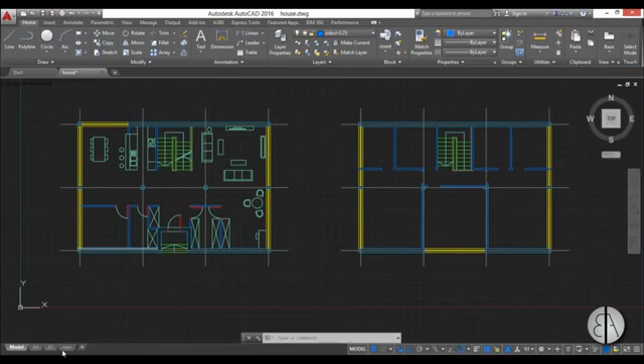First thing you need to do is create a new layout. Now we're in the model, and here we have layouts, we have model, and we have two layouts. We're just going to create a new one by clicking this new layout button. You can rename it by right-clicking on it and finding rename, and call it new. I'm going to click on it, and here we have our layout.

Now we don't really know which size of sheet this is, and here we have a window inside of our drawing which we don't really need at this point, so I'm just going to select it and delete it. Now we're going to set up the size of this sheet.

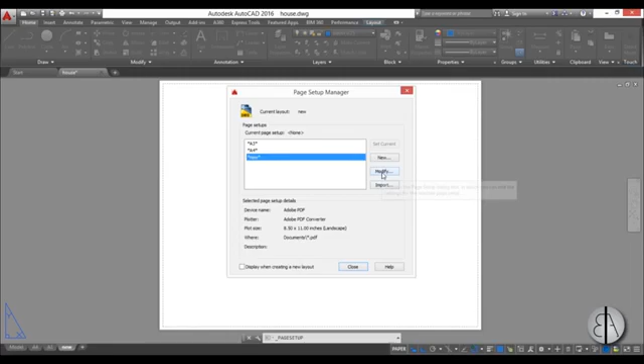I'm going to go up in this Start menu, find Print, Page Setup, and here we have our Page Setup Manager, and here we have our new layout. So I'm just going to go to Modify, and first under Name, here we have to just set it up as DWG to PDF. This is best if you want to export it as PDF later.

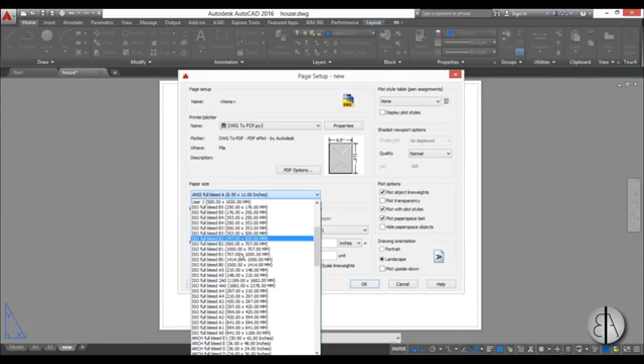Now as paper size, I'm going to use an A3 and portrait, because I want these two floor plans to be one on top of each other. So I'm just going to find ISO full bleed A3, which is over here, and if you select the first one it will be landscape, and if you select the second one it will be portrait. You can manage that later over here, but I prefer to do it this way. And of course check here portrait as well.

Now we have to customize the scale. Here we have some fraction that we don't really need. For now I'm just going to write it as 1 millimeter equals 1 unit, and that is wrong at the moment. This drawing is in centimeters, and 1 millimeter is 0.1 centimeters, or 10 millimeters is 1 unit or 1 centimeter. So just make sure that your units match. If it was in meters, then I would have to write 1000 millimeters.

Okay, now we've done the scale part. Now we need to set up the plot style. You need to open up this menu. If you choose none, all the colors will be preserved, and you will have basically a colored drawing. But if you find grayscale, that will make sure that everything that's a darker color will be a darker gray, and everything that's lighter, like yellow for example, will be lighter gray. I prefer monochrome, which basically means that everything is black.

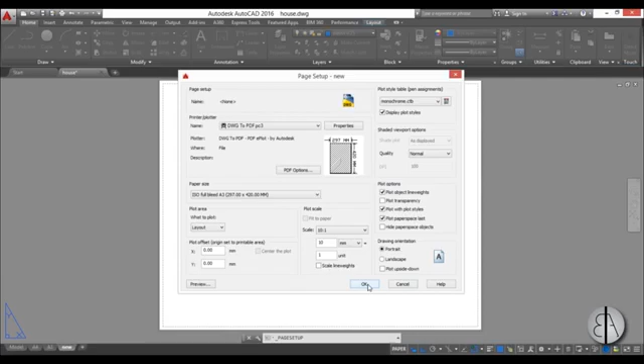Just check here display plot style so you can see in this layout view your correct plot style. For quality I'm going to leave it at normal, I found that this works best, you don't need to make it better. And here we have some options - if you have any transparencies, for example some hatch that's transparent, you would want to check this, but I don't, so I'm leaving it unchecked. That's everything, so I'm just going to click OK and close this up.

So here we have a portrait A3. Now we need to create a window inside of our model for both floor plans. So I'm just going to go to VPORTS, which is the command for viewports, and because we're doing 2D drawings I'm just going to leave it here at 2D.

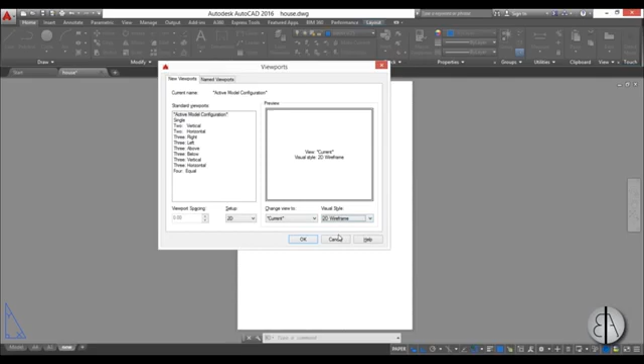If you did 3D you need to check 3D, and for visual styles I leave it at wireframe. It doesn't really matter when you're in 2D. So I'm just going to go OK, and now we can create a window, one window on the upper half of this A3.

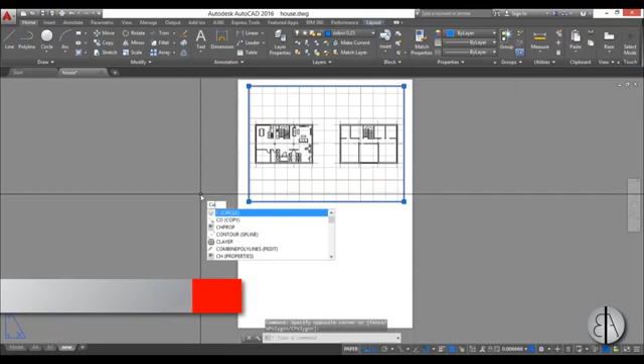Now we have our two floor plans, but we have a problem. We want this floor plan to be above and the other one below. So what do we do? We're just going to select this one, copy it, and place it underneath.

Now that we have our two viewports on top of each other, we need to set up the scale. First we'll double click inside of this. You see now we're in paper, but if we double click inside we'll be in model space, so we can move around or zoom in or zoom out.

If we zoom, it won't really be a correct precise scale, so to set that up correctly you need to go to this drop menu, open it up, and find your scale. I'm just going to use 1 to 100, and now this is in perfect scale.

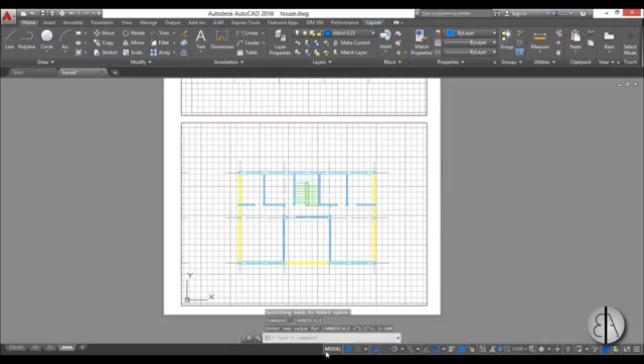I like the position of this on paper, so I'm just going to lock it in place here, and do the same thing for the lower one. Double click, place it over here, open the drop menu, set up the scale, then double click outside or click on the model to step out of it, but first let's lock it in place and hit model to escape.

Here we have some grid lines left over from this one, and in this one we have some grid lines left over from that one. In order to fix that, we'll just move this a little bit like that, and this over here.

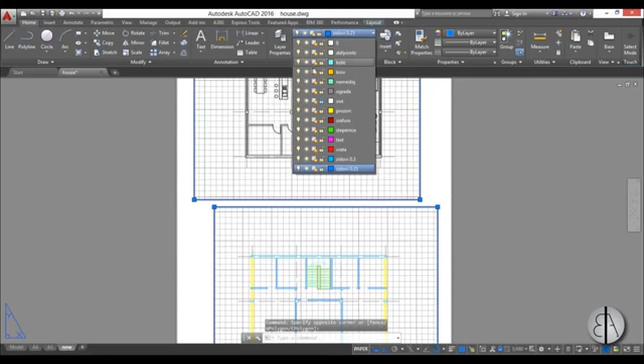Now, something I don't like is these two rectangles. I don't want to leave these over here, so I'm just going to select both of them, and now they're on just a random layer. I'm going to put it on the def points layer. Def points basically means it doesn't show up in printing. If you don't already have a def points layer, just create one, name it def points, and it will automatically not print.

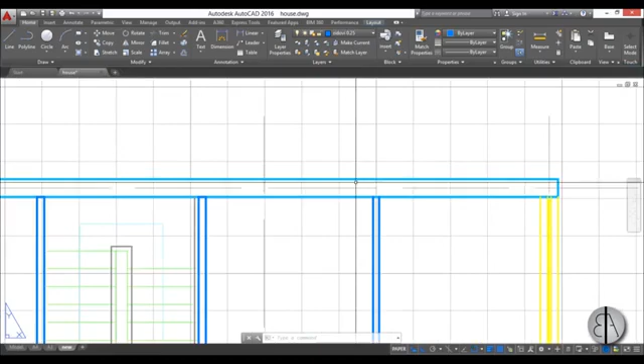So I have everything pretty much set up, everything is in correct scale. I'm just going to check to see if the line thicknesses are right, so check over here to show/hide line weight, and when it's turned on you can see these lines are heavier than these, for example. Same thing here, okay, that looks right. And if you don't have this icon, just open up this menu, find it, and check line weight. Once we've done that, it's pretty much ready to export as PDF.

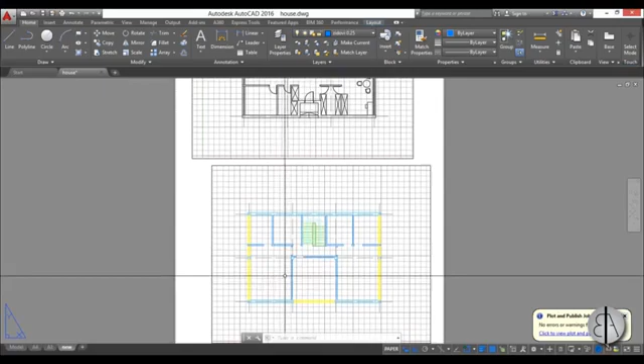So I'm just going to go to Start menu, Export, PDF, go to Desktop, and call it House PDF, save, and now we've exported it. Now you can see it's colored, this lower floor plan is colored, and this is just a problem with AutoCAD. It sometimes messes up, but this will not be colored when we export.